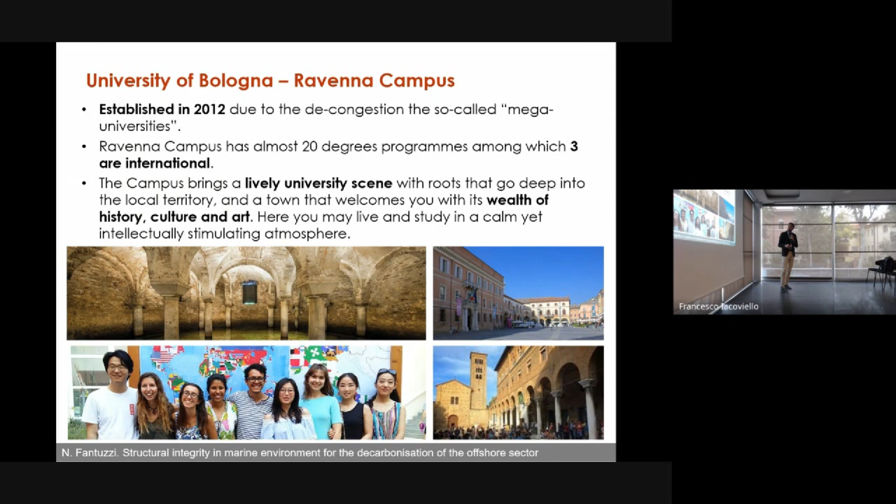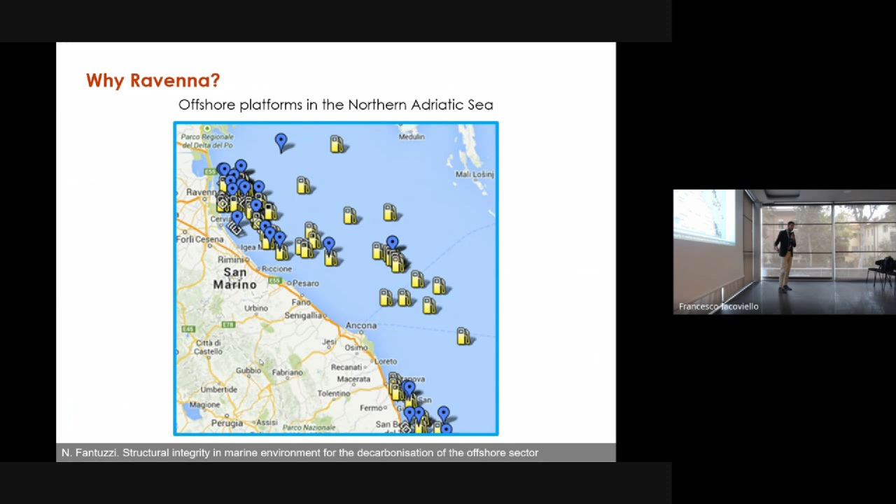In Ravenna we have a master's program called Offshore Engineering for Energy Transition, where we give lectures about offshore structural dynamics, fatigue, materials, processes, etc.

Why do we have this master's program? Because my department is quite large - we are the Department of Civil, Chemical, Environmental, and Materials Engineering. So we basically gather all our knowledge, which comprehends the offshore sector.

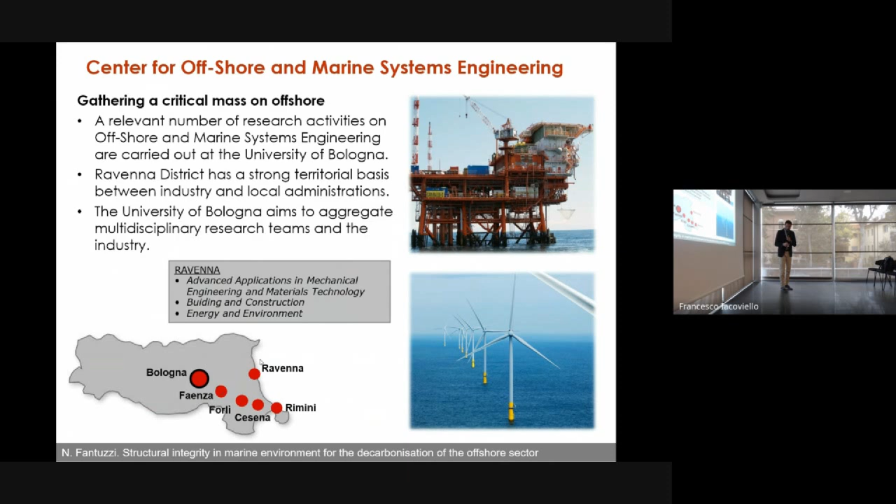So let's jump into the presentation. The motivation for this talk is the following: Europe is asking us to decarbonize the oil and gas sector, and the procedure we would like to apply is the so-called global-local fatigue analysis. I'll try to give you some insights about this.

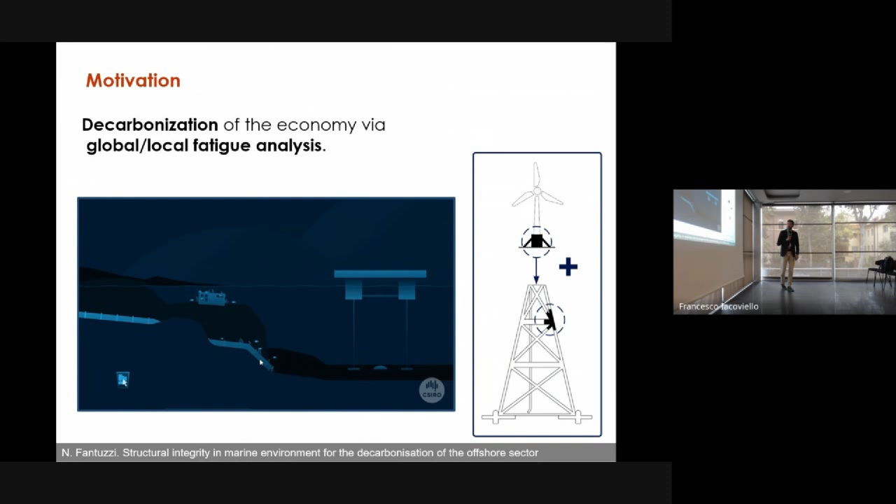Another motivation for considering fatigue - you may already know this - is that fatigue is one of the most common causes of accidents, both in oil and gas installations and wind turbines, which is currently the commercial solution for renewable energy. Of course there are other solutions, solar panels, tidal waves, and others, but this one is commercially and worldwide accepted, from China to the United States.

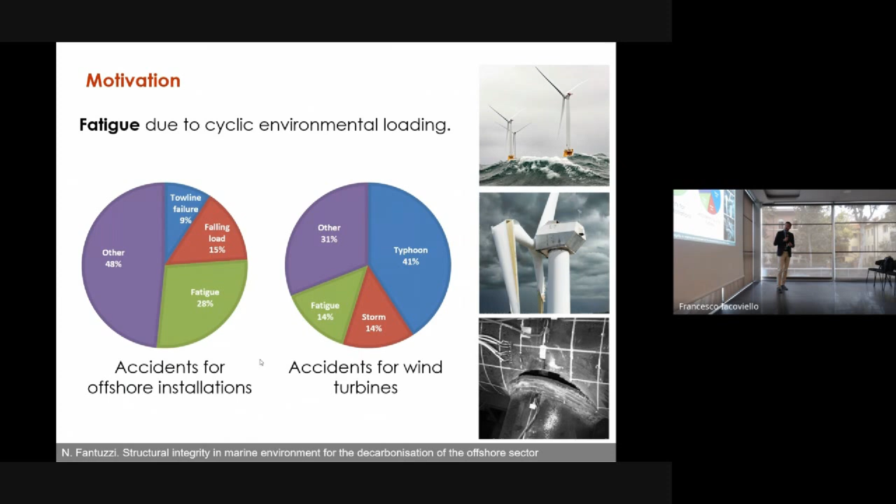If you're not familiar with the offshore environment, structural engineers have to convert environmental loads into actual forces. We start with metocean data, given by oceanographers, and use wave modeling - the well-known Morison equation - and wind modeling, which can be taken from high-rise buildings and bridges.

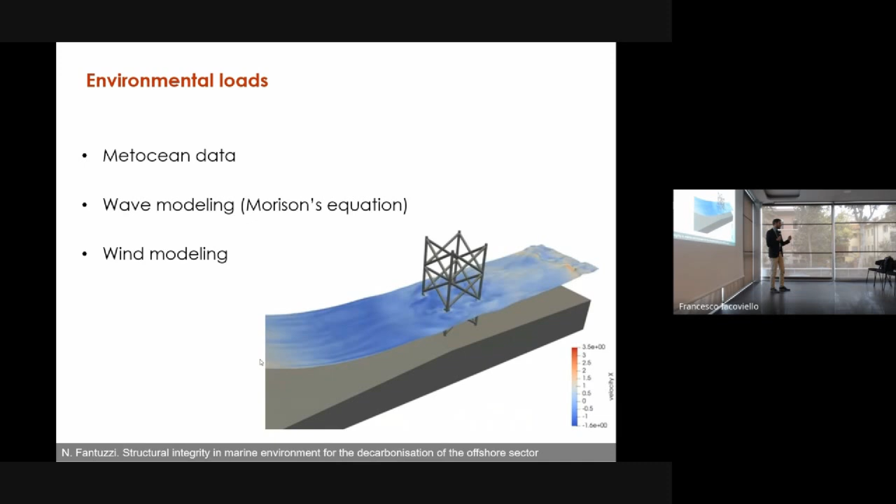For structural integrity, I don't have to explain much since you're experts already, but what we're going to apply is a stress concentration factor concept and multi-axial fatigue approaches. We'll show this later in order to get a fatigue damage assessment of the structure, giving us a rough idea of how many years we can keep the structure in place without demolishing it.

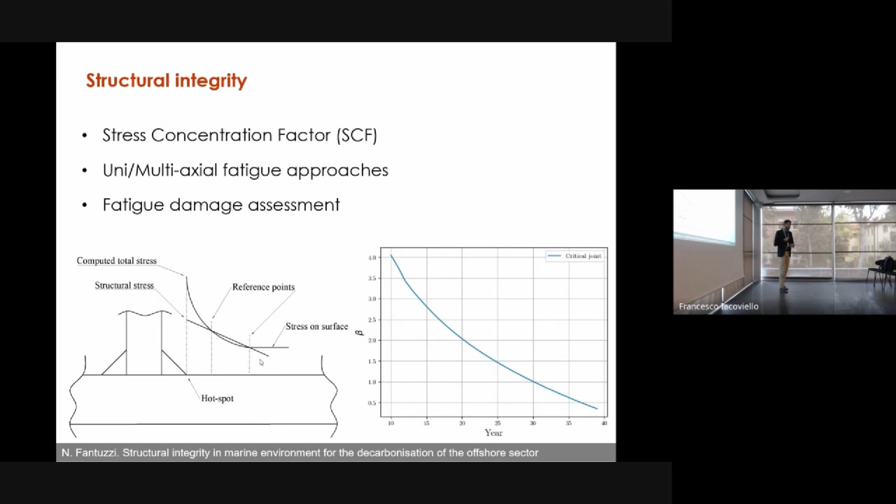So for metocean analysis, I'll just give you a brief overview - a few slides on how to get this data, or take data from the literature.

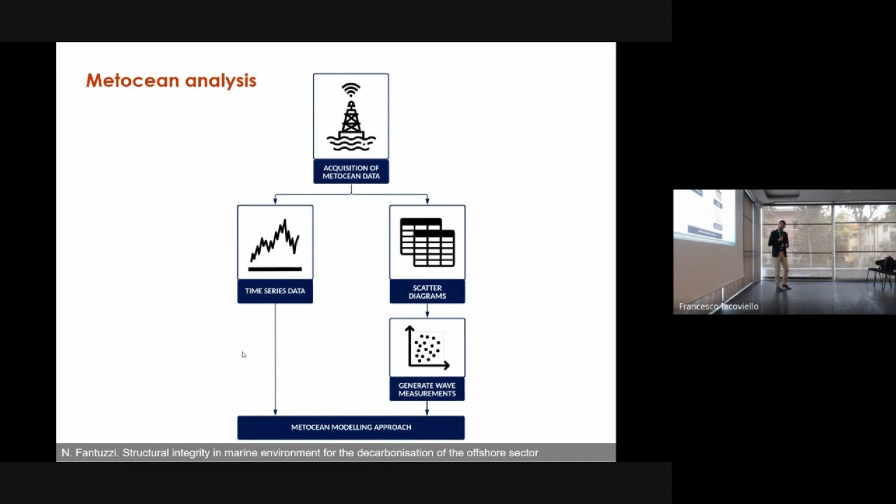We are lucky because we have some real data that we are able to extract - two ports in Portugal, Leixões, which is the port of Porto, and Sines, close to Lisbon, and Tillamook in the United States.

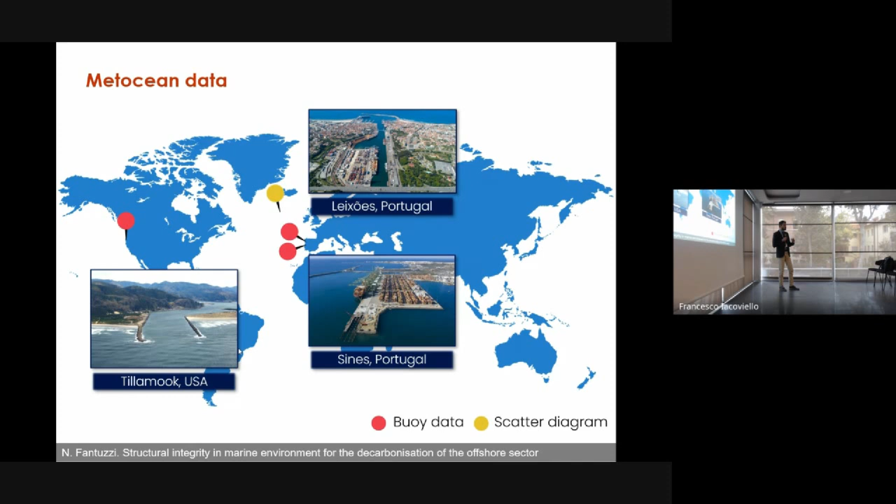We extracted some data from the so-called scatter diagram, which is a sketch that probabilistically gives you information about wave loads. Metocean data comes in this form, a bit complex - we need to synthesize it to extract the information we need. Mostly we need significant wave height, which is a key parameter offshore, the period associated with that significant wave height, and wave direction, since waves come from different directions, from 0 to 360 degrees.

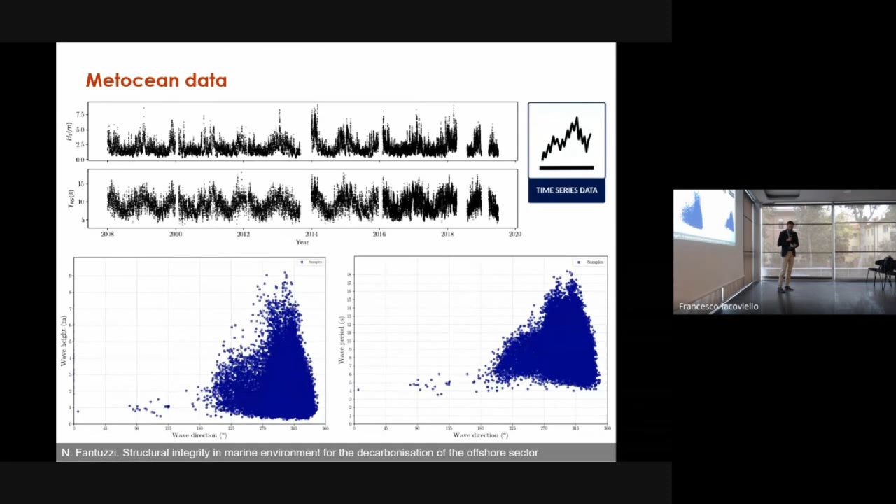Metocean data is available in the literature, and we extracted some data from the Northern Atlantic Ocean in tabular format. These are obtained through buoys located at ocean or sea locations around the world, and from those tables we're able to extract significant wave height and wave period.

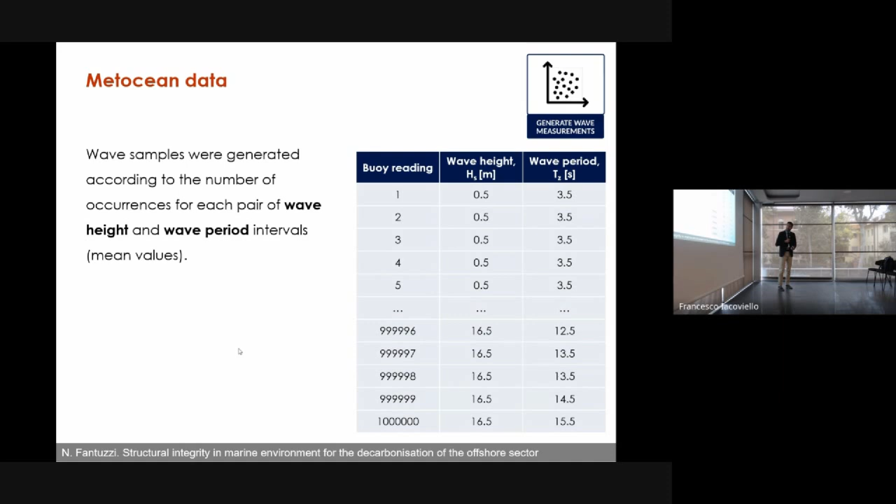With this data we basically get a statistical description of the load, which is not deterministic - or at least, from the statistical distribution, we can extract a deterministic view of the load to run deterministic analysis, like time history analysis, or stochastic analysis.

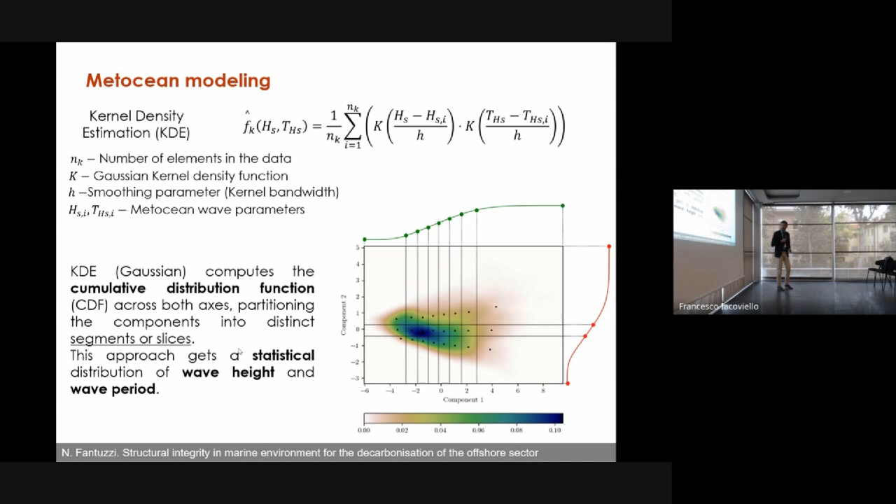When we talk about decarbonization, we must introduce the topic of decommissioning, because this is a hot topic - you'll find discussions about it in many posts on LinkedIn and in papers. Decommissioning follows these rules: prevention, reuse, recycling, and disposal.

Of course, what we want to do is reuse. So we work on prevention as much as we can, and when we can't do that anymore, we try to reuse an oil and gas platform for other purposes - in this case, for green energy. Unfortunately, what we don't want to do is dispose of the platform.

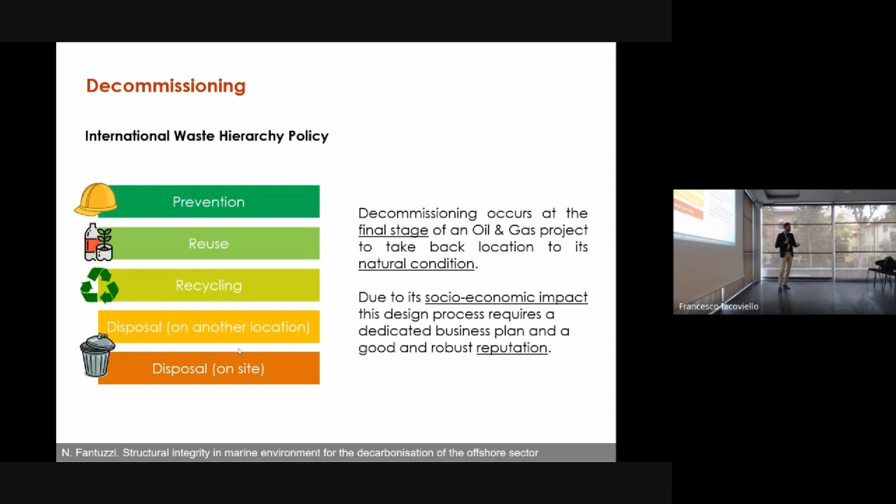But decommissioning is not only engineering or mathematics - it involves several different things, especially laws and regulations. Decommissioning in Italy or Europe is different from decommissioning in the United States, different from decommissioning in North Europe, etc. We always have to follow laws, and sometimes it's not possible to reuse, so you must dispose, because you have to bring the environment back to the status it was in before the oil and gas condition. But I'm not talking about that in this presentation - just assume that you can reuse the platform as it is and continue to use the site.

From the mechanical point of view, it is a quite simple procedure. First, you cut the well, then you remove the deck, then you remove the foundation and remove the jacket if you want to decommission the platform. This is quite easy to do. If you want to reuse it, you stop at step two: close the well, remove the deck, and do something else.

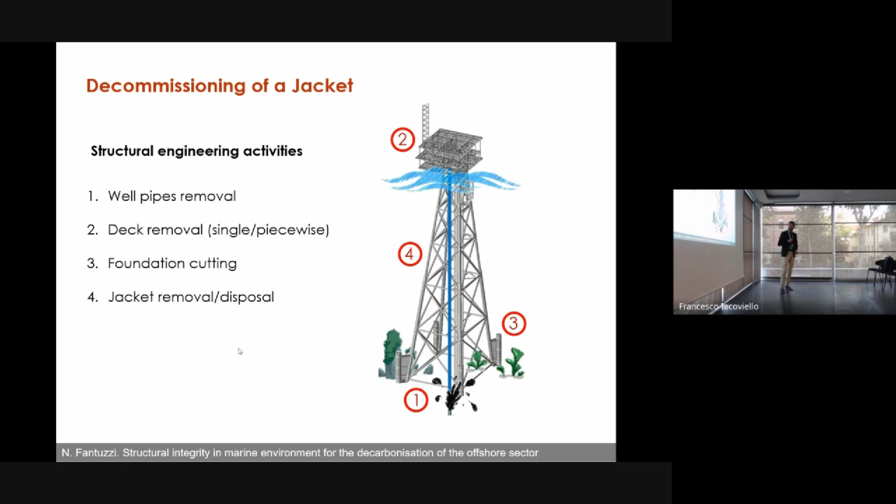As a start for global analysis, we perform some reduced order modeling. So we take a dummy platform and just model this platform with a reduced number of degrees of freedom. This allows us to have a quite fast and reliable model.

I will show you some results to perform retrofitting activities. Clearly, with this model, we lose information on details, but that's not the purpose of global modeling. The global modeling just requires you to have an indication of what the status of the platform is at that stage.

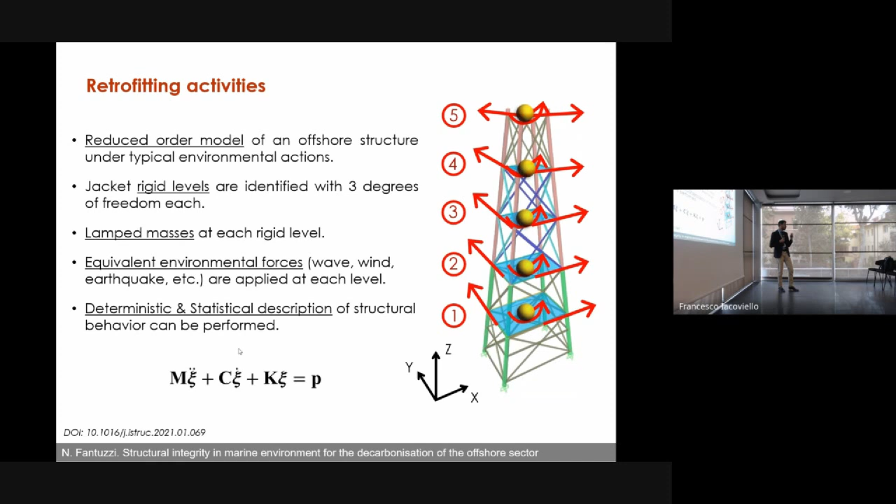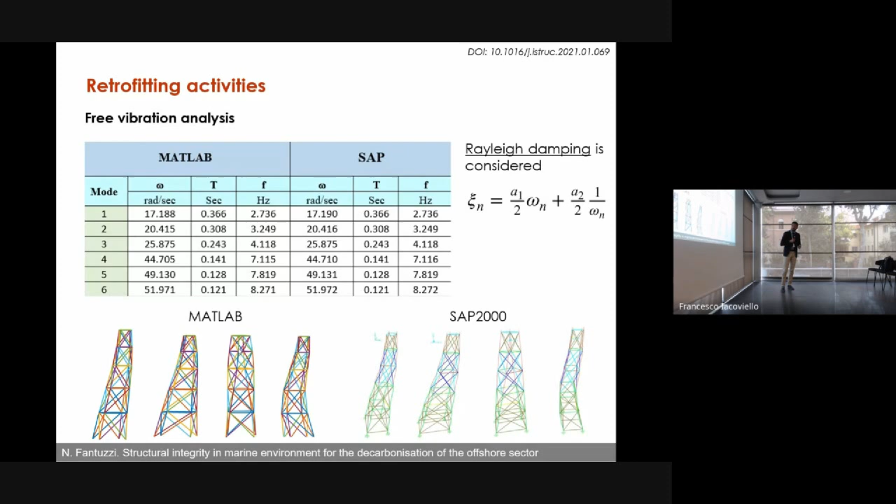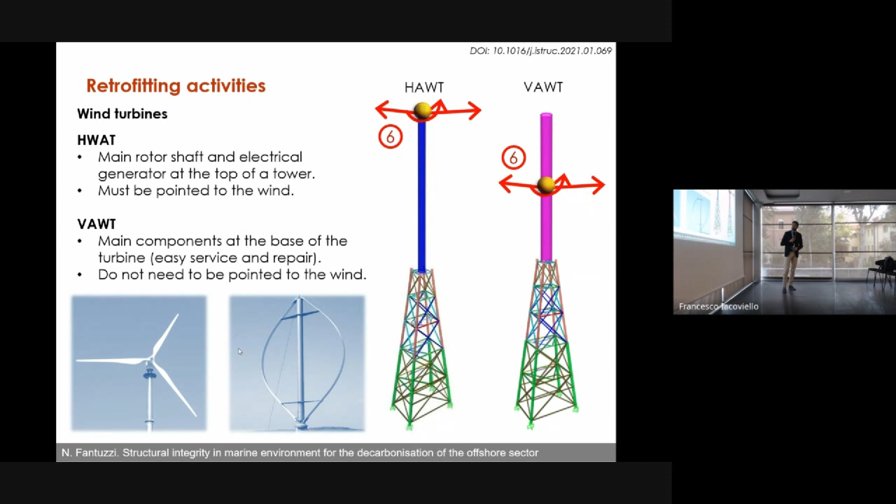As I said, it's quite straightforward to do retrofitting in the sense that we assume we're removing the deck and installing the turbine, which can be horizontal or vertical axis in this case. I'm not going to discuss the details of these two turbines, but we can discuss later if you want. Basically, you can just run it again, and the results are quite nice.

Unfortunately, when you go to stochastic analysis, there's a problem at the top, because of course the platform was not designed to bring a long beam on top of it.

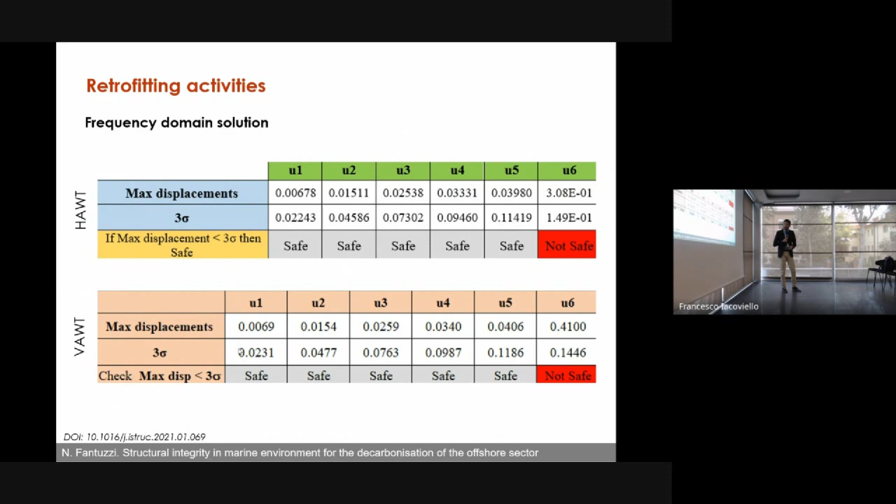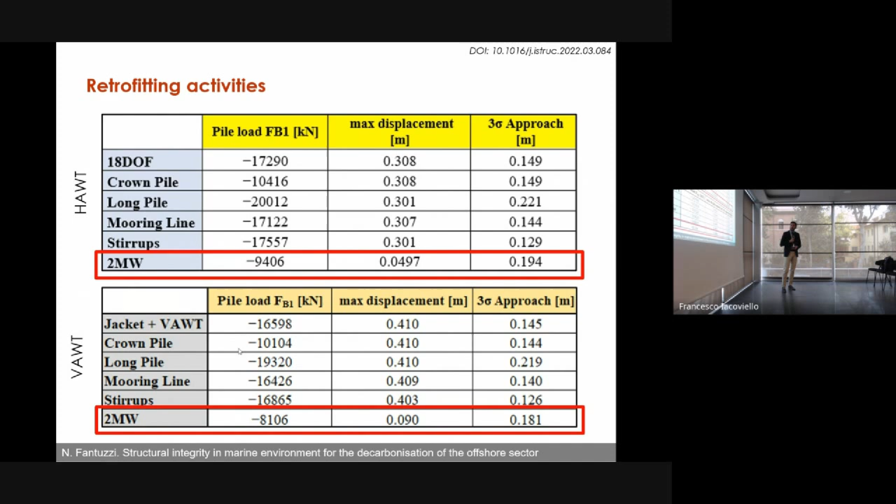So you should go to retrofit, and you can strengthen the structure in different ways, or just install a smaller turbine. These are some results we carried out. I want you to focus on this line, which is a smaller turbine, because you'll see something similar at the end — just to see the difference between installing a 5 megawatt versus a 2 megawatt turbine, for the fatigue life of the structure.

Regarding fatigue, what we carried out was actually the PhD work of our student, Paolo. We studied several specimens, especially welded parts, because they are the most critical hotspot areas in a platform.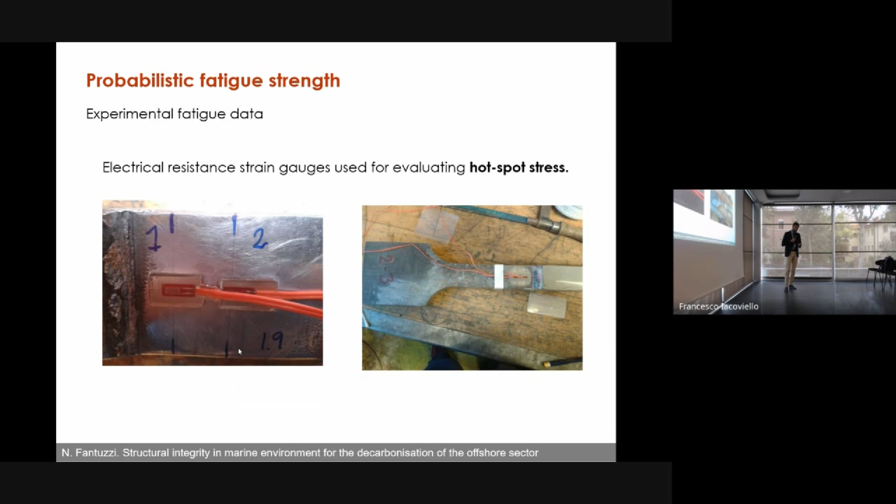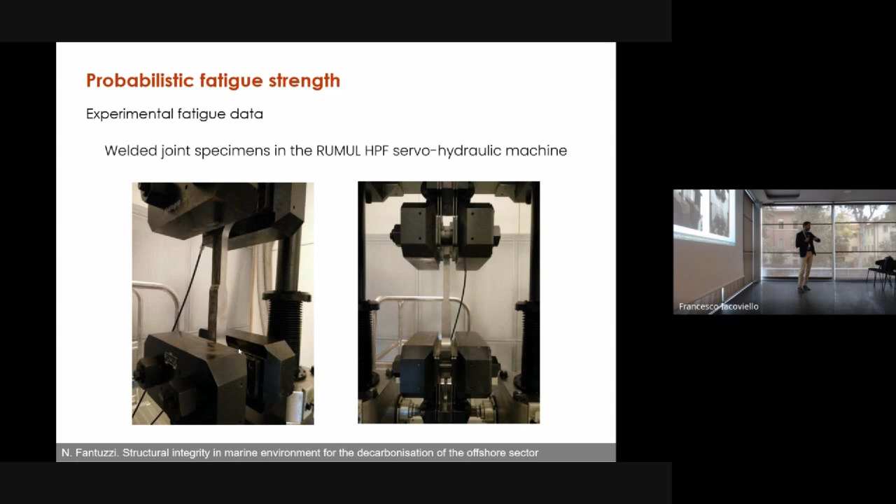Of course, I have a lot of results that I decided to cut because it becomes less interesting, but clearly in a platform we have joints that are in air, joints that are in water, and joints in the so-called splash zone.

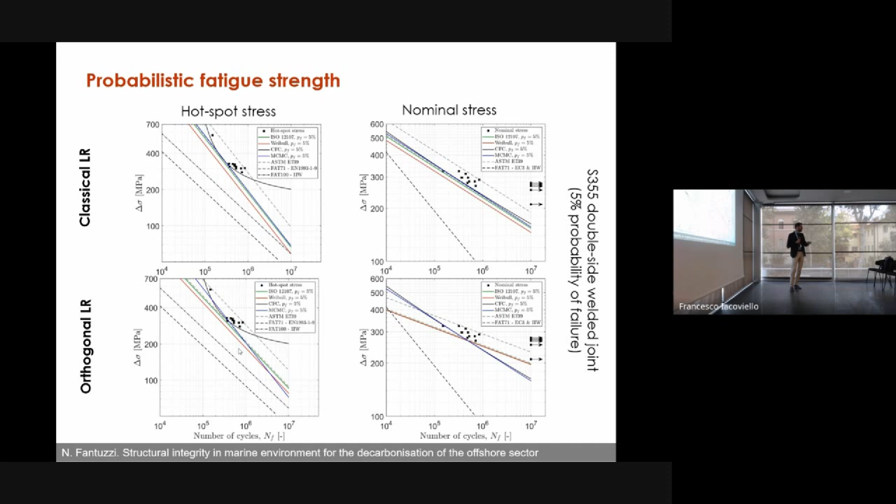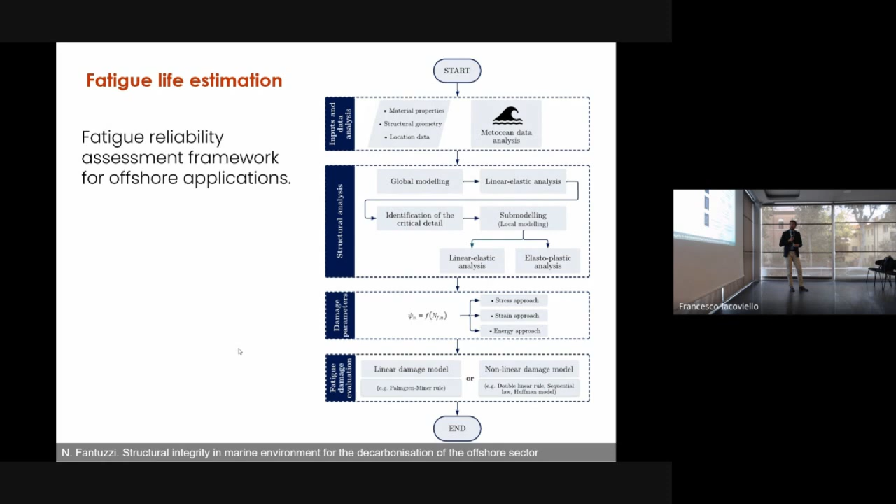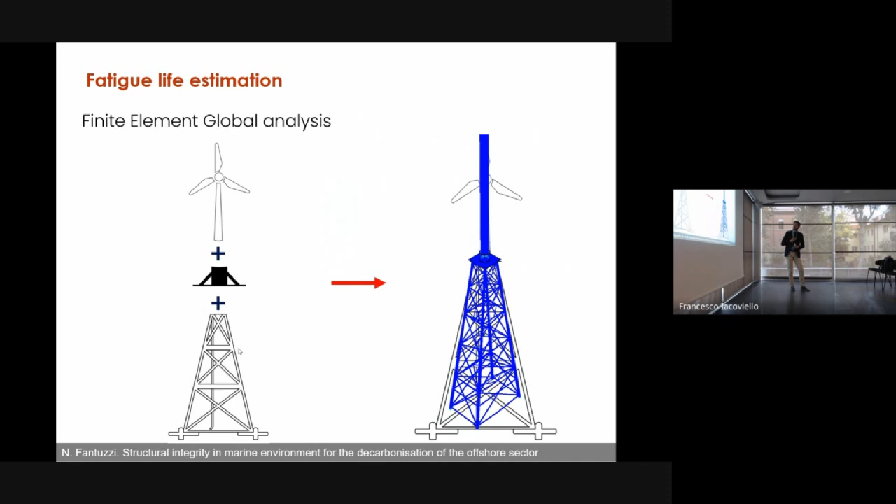The transition piece is actually still an open topic because we don't know how to do it exactly. Many companies do it in different ways. So we studied this design, which has main piles on a plate, with reinforcement going to the legs of the platform. But as you can see, there are some operations with plates and hotspot stresses in the joint.

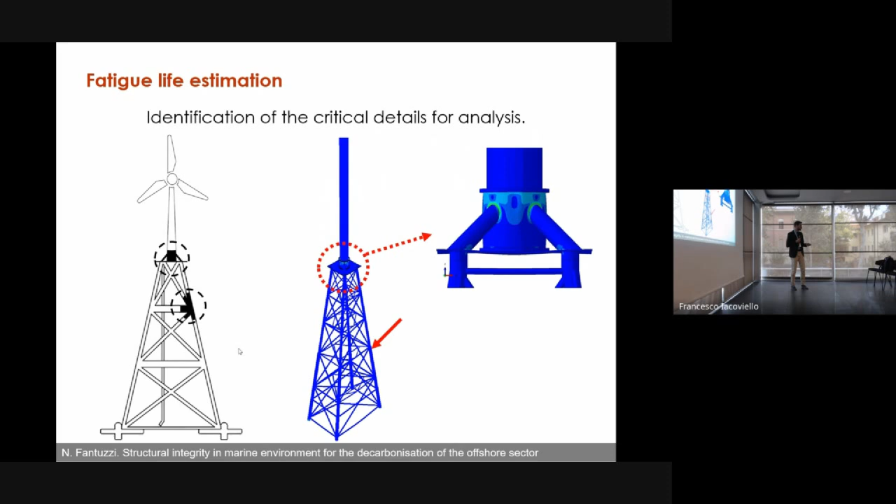You will find in the literature many different designs of this transition piece. During the conversion, we have the classical hotspot in the joint of the platform, which are more critical due to the heavy loads with the tower, plus the joint in the transition piece. So we have extra joints to verify, and the original joints that have reduced life due to maybe 20-25 years of operation have to be strengthened.

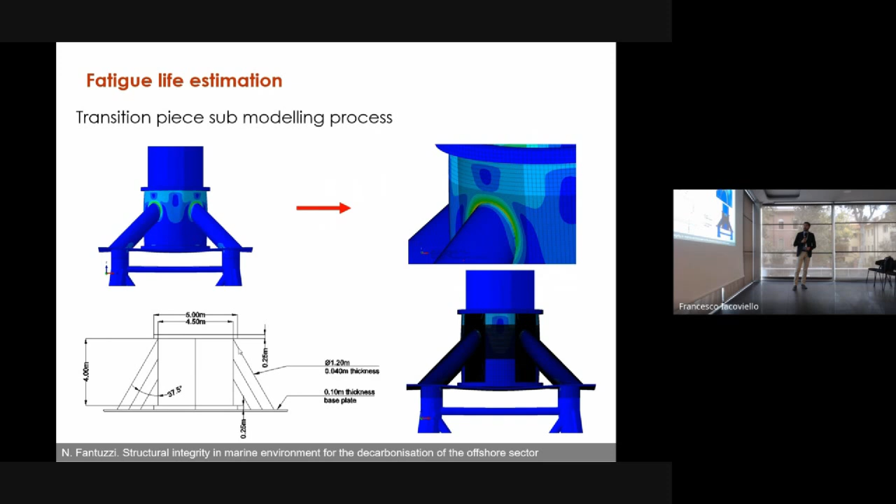So these are some pictures of the submodeling, just studying the transition piece using Abaqus, using as boundary conditions the legs and the tower up top. And these are some of the stress history curves that are used for fatigue analysis.

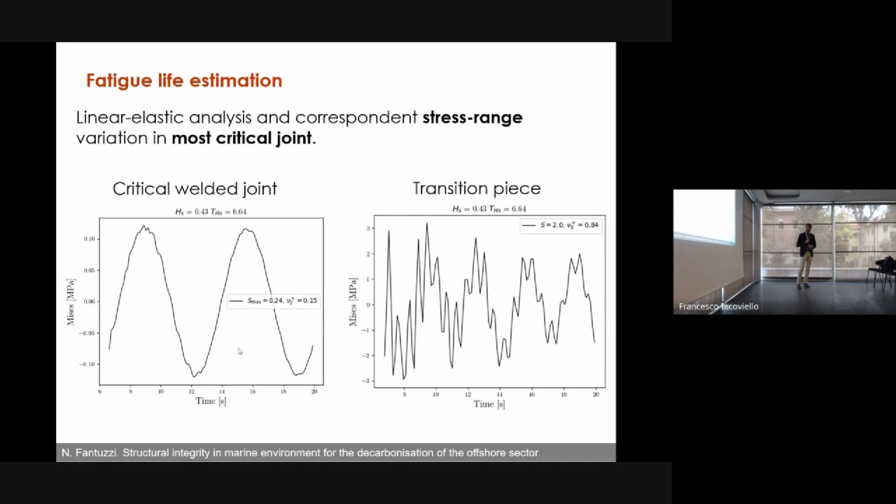So for the critical weld joints, we have a more or less sinusoidal approach, and for the transition piece, this is more like random load. This is why the transition piece is a little bit more difficult to verify.

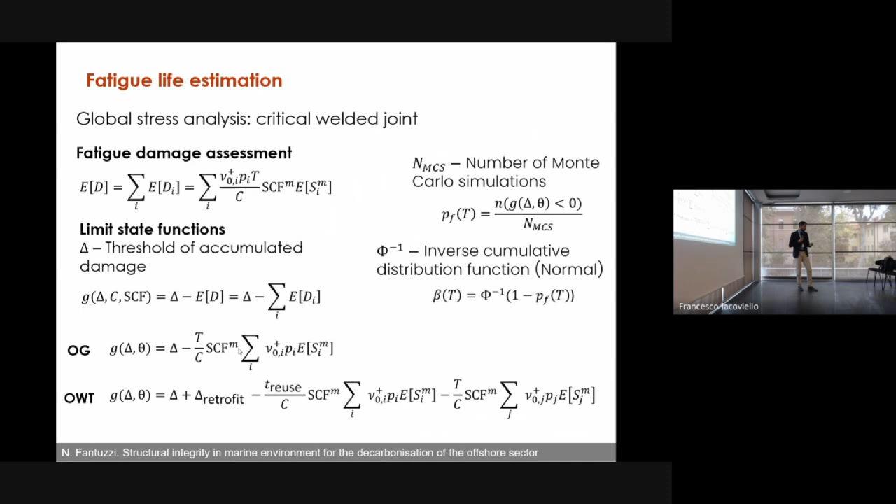By using our global stress analysis, which is quite a standard procedure, we are able to compute a fatigue life for the oil and gas time frame, and a fatigue life for the offshore wind turbine phase. The output of the model is something like this, in which, even after 30 years, you still have some fatigue life available.

Then you perform some retrofitting, and then you apply the wind turbine. So remember the 2 megawatt turbine I mentioned before. This is the difference for the case we are studying, which is a dummy model: the difference between installing a 5 megawatt turbine or a 1.5 megawatt turbine.

So looking at the difference in the residual, we open a discussion now. We install a larger turbine, so we make more energy theoretically, but the platform lasts for less time. Or we just install a smaller turbine, making less energy, but we can use it for more time.

This kind of simulation is not enough really, because if you want to see the overall picture, you should include economical variables for installation and maintenance costs in this analysis. We cannot only look at the single life of the platform.

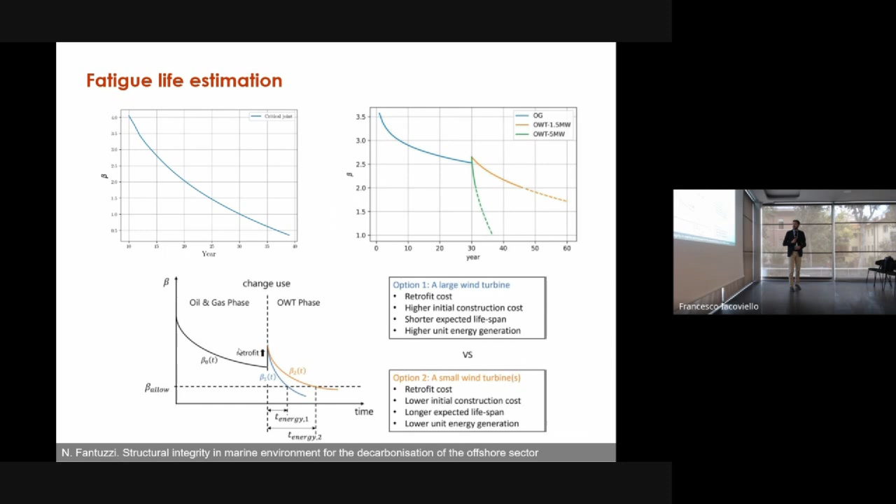Just to show a few slides to conclude what we are looking at. We are working with this company, and we use software Akselos, which is developed by MIT in the States. Basically, this is a reduced order model finite element software, which is able to implement data-driven analysis.

So by taking data, you can make estimations using machine learning techniques on the platform. The aim is basically to compare our approach with this commercial software and see the advantages and disadvantages. Clearly, a clear advantage of Akselos is that it works in a reduced order model approach.

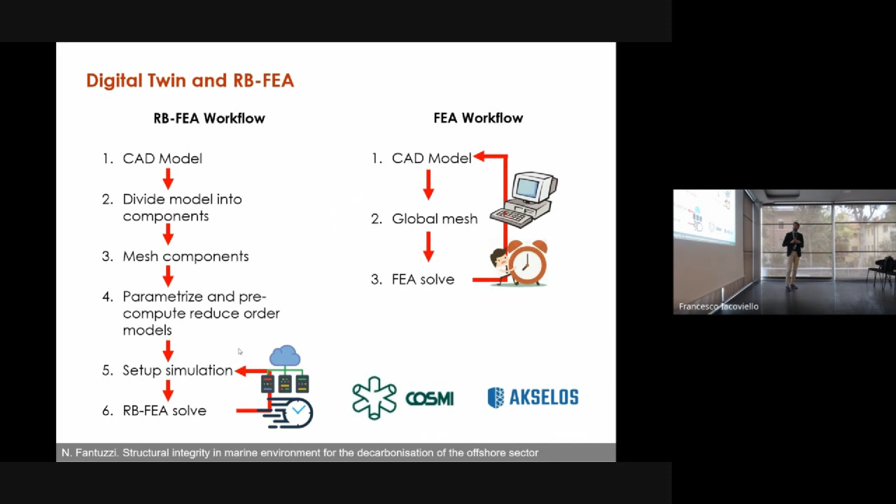Which means it runs in the cloud extremely fast compared to classical finite element analysis. This allows you to get results in a very fast way, just using a browser, so the software runs in the browser and in the cloud.

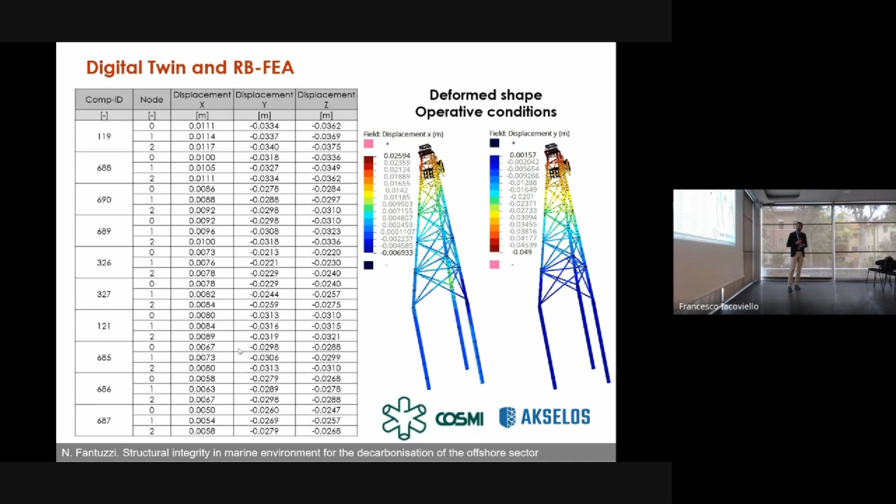These are just some pictures taken from the software. This is not a classical finite element software, it's a component-based software in which the elements are within each component, so each component has several elements. This requires some extra effort in making the original model, but then you get basically everything you'd have from a standard finite element software, which is displacement, forces, and the utilization factor.

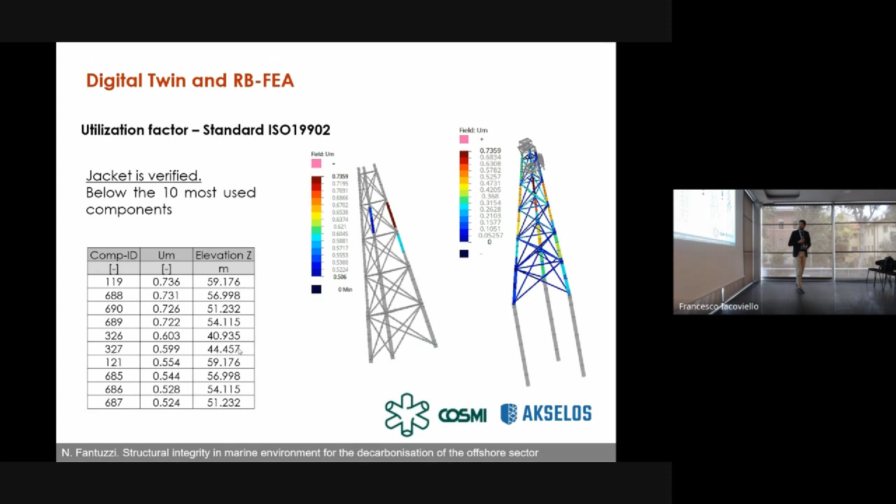This is based on fatigue analysis done within the software. Yes, this is the analysis. So the procedure is standard, as any other finite element software in offshore, just done much faster.

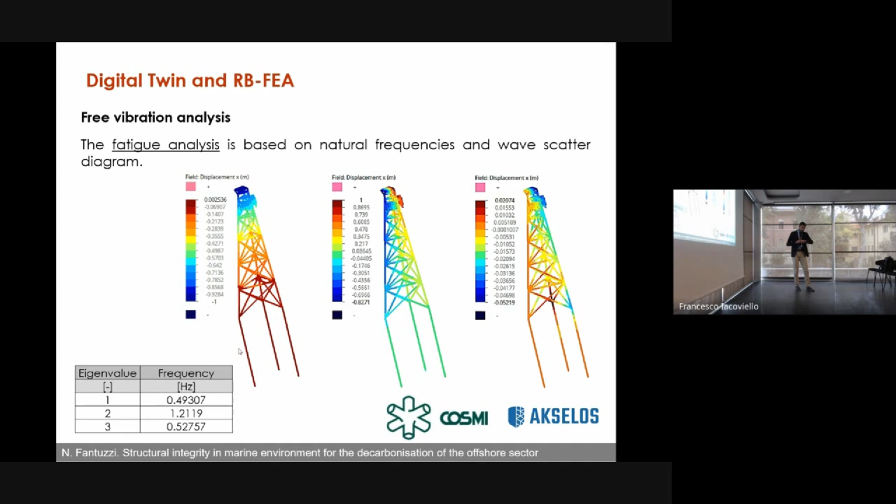So yeah, this is just some other results on critical joints. The software is able to identify it, but also, of course, with the help of the analyst.

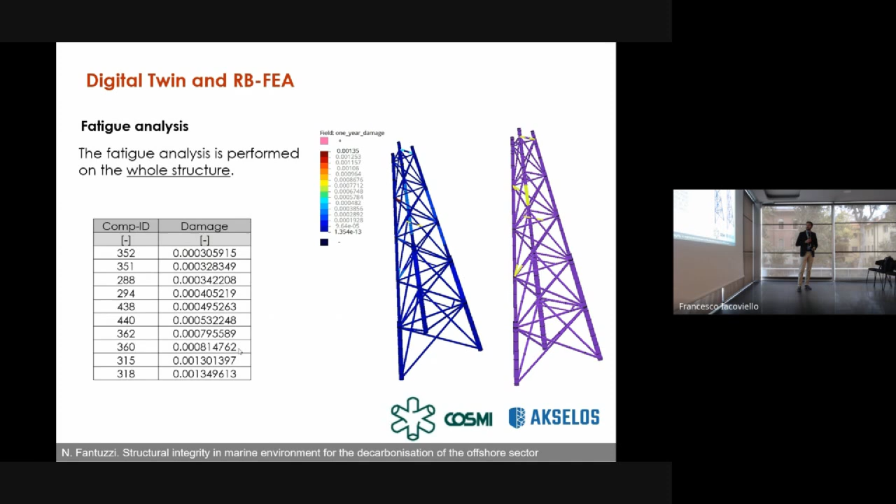I think I can just finish my talk. Basically, we try to demonstrate that the global-local fatigue approach is a viable alternative and strategy for the reuse of platforms, if possible, because it's not always possible everywhere.

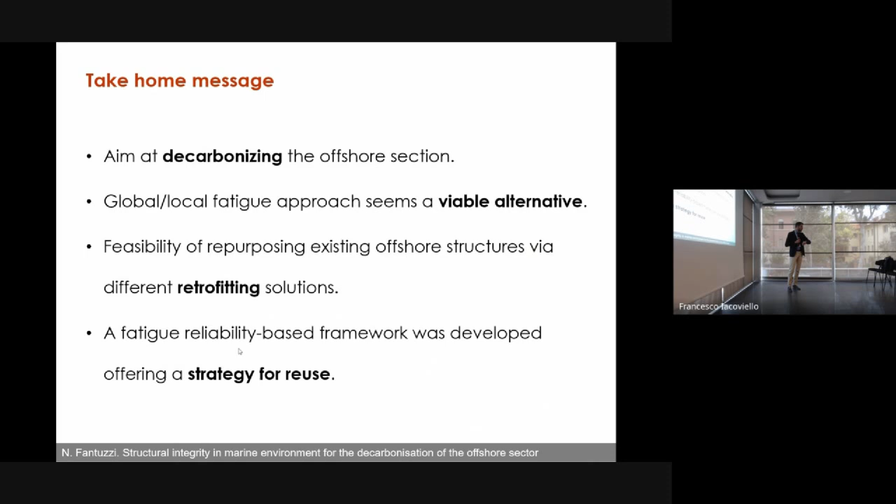Just to stimulate the discussion, I want to leave you with this phrase from a professor in the United States: if you really think that the environment is less important than the economy, try holding your breath while you count your money.